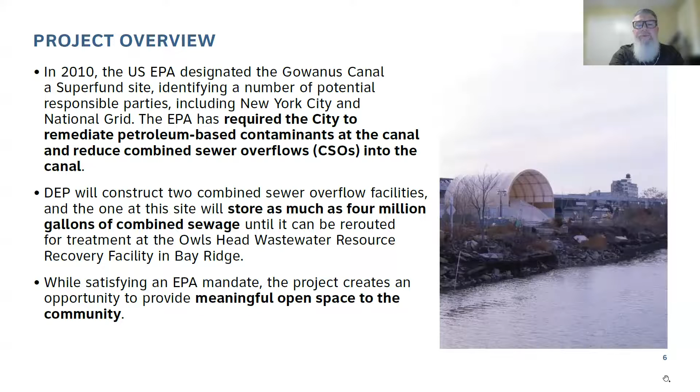You might recall this slide from the last public meeting we had. Just to review again, what a CSO is, or what a combined sewer overflow is. During dry weather, all sewage that comes from people's homes and businesses is sent to the wastewater resource recovery facility. In this case, it's the Owl's Head facility in Bay Ridge, and that treats the sewage.

However, when it does rain, the sewers can reach capacity, and an overflow would occur at a regulator shown here as number 4. And so you have a discharge of diluted sewage that would overflow to the adjacent water body. In this case, that would be the Gowanus Canal. I should also mention that approximately 60% of the sewers in New York City are so-called combined sewers.

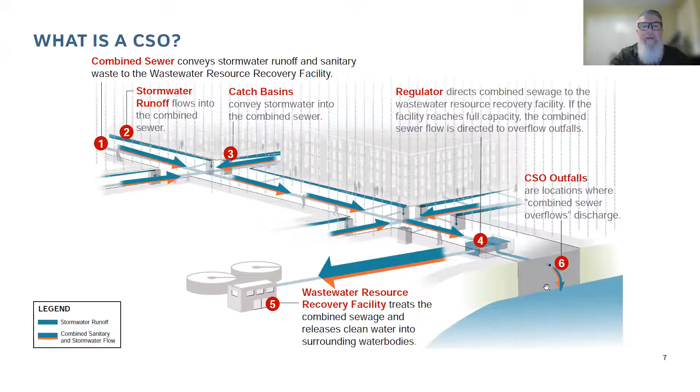So CSO retention facilities collect and store combined sewer flows during wet weather events and then pump that flow back to the wastewater treatment plant. Here's a cutaway of the proposed facility at Owl's Head. Most of the facility is below ground, and the sewage is stored in those below ground tanks. There is a head house, as shown to the right, that houses all the mechanical and electrical equipment, including the screens that will screen out any solid material that's in that sewage, provide odor control, and also houses the pumps that pump the flow back to the wastewater resource recovery facility.

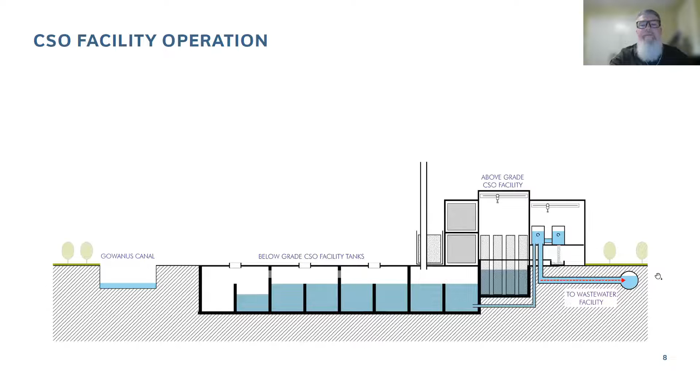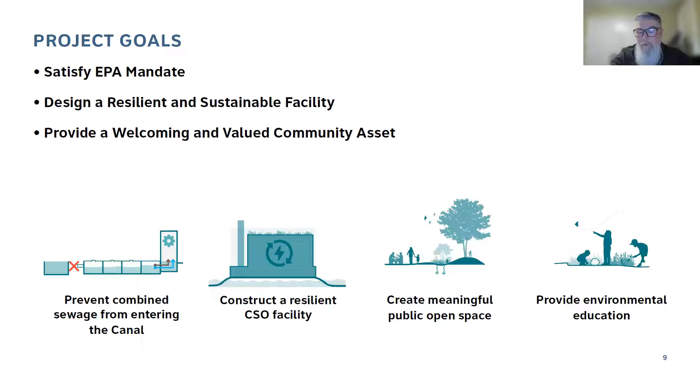So our goals in approaching this project are to obviously meet the EPA mandate to construct the CSO facility, also to construct that facility in a resilient and sustainable way, and also provide a welcoming and valued community asset. We have heard from many folks that embedding a sense of environmental stewardship and education into the project is a priority, and we'll be working to ensure that the project meets that goal as well.

Brief discussion on the schedule. We do have a very ambitious project schedule to meet EPA mandated milestones on both the design and the construction side of things. And we've also been coordinating closely with the existing partners on site. That's the Department of Sanitation and their partners, Big Reuse and the Gowanus Canal Conservancy. This is the second in a series of public engagement meetings, and we'll continue to schedule those meetings throughout the year as the design advances and we're able to focus in on more detail.

The first start of construction is actually underway. You might have noticed that the new bulkhead is being constructed on the northern edge of the Salt Shed Peninsula. And then as far as the CSO tank construction, that is expected to begin in 2023. And as that's moving along, we will have a dedicated community liaison on hand as a direct contact for any community concerns. And construction is expected to be completed before 2030.

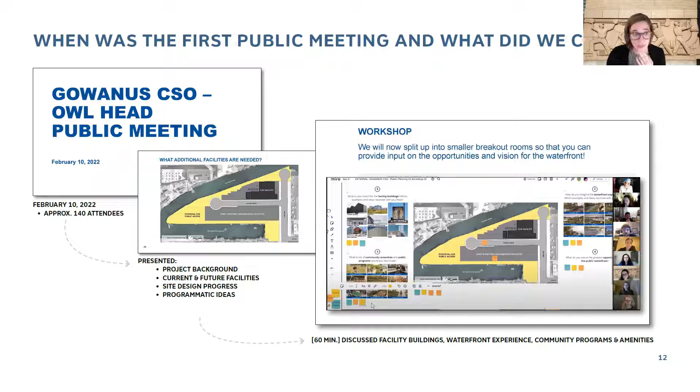So the first public engagement meeting, as I said, was on February 10th, and we had over 140 people attend, which was really amazing. At that meeting, Kevin did a similar overview to what he just did, and we also walked through the facilities that are on site that we need to put back on site, and what we need to build for DEP's project, and then also opportunities for public open space and programming ideas. So then we broke into 3 breakout rooms, and we heard a lot of really great ideas from all of you, ranging from really big picture ideas to the more sort of granular ideas that we might get into later in design. So what did we hear?

Anna, next slide, please. And forgive me while I read this slide, but I think that's sort of the easiest way to go about this. So we had posed questions that broke the categories of feedback down into 3 categories, right? So that we could focus and understand what we were talking about.

So in terms of the facility buildings that we would be creating here, folks were really interested in making sure that the architecture and the urban character was reflective of the Gowanus neighborhood. And they were interested in sustainable strategies such as green roofs and solar panels. They were looking for opportunities for historical interpretation and educational signage related to DEP's operations, and really looking for a reduction in the vehicular presence and a support of pedestrian access around the entire waterfront and the access drive cul-de-sac.

In terms of waterfront experience, folks are really interested in having an ecologically responsive and natural shoreline that supports different habitats and native species, looking for a variety of edge conditions, including hardened bulkheads, softened edges, and boardwalks, looking for boat launches and access points for pedestrians, and improved access and circulation across the site, meeting all accessibility needs.

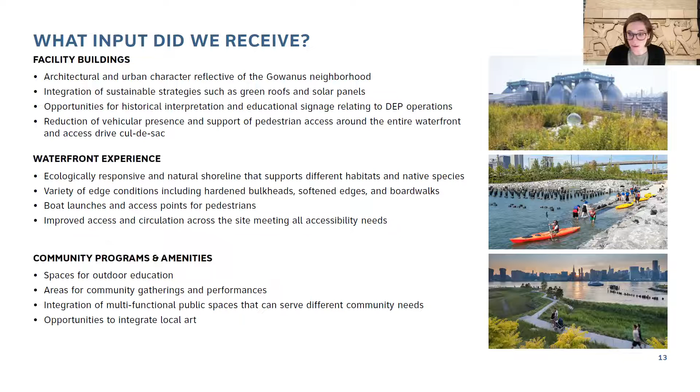In terms of community programs and amenities, people told us that they were looking for spaces for outdoor education, areas for community gathering and performances, and maybe even dance parties. We heard a little about some fun dance parties going on. Integration of multifunctional public spaces that can serve different community needs, so really multi-purpose, and opportunities to integrate local art. Anna, you can go to the next slide.

So this is the plan that we shared at the February meeting, and it's overlaid with site program suggestions and the precedent images that folks responded strongly to. So some of the big moves we're looking to make are to prioritize spaces for outdoor learning and flexible public programming, provide an ADA accessible boat launch at the 6th Street turning basin, make the 2nd Avenue Street end a primary waterfront access point, and provide a continuous promenade along the waterfront with areas of softened shoreline and tidal marsh, and really integrate habitat opportunities into those varied edge conditions.

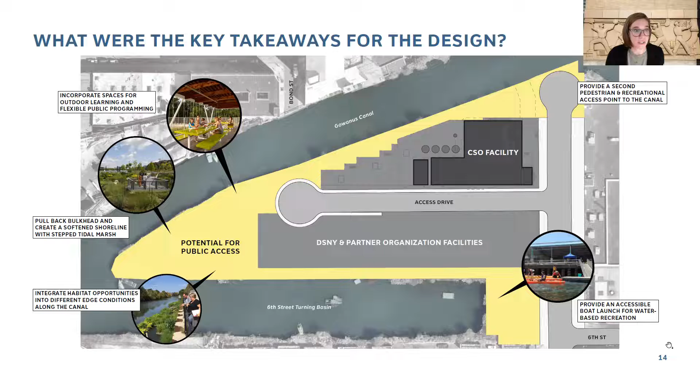So I'm going to hand it over to Kevin Keating from Selldorf Architects to walk you through the site and the circulation in the various stages of work. Kevin, take it away. Great. Thank you, Alicia. And thanks, everybody. My name is Kevin Keating. I am a partner at Selldorf Architects. It is a pleasure to be here with you this evening. Please allow me to take just a little bit of your time to walk you around the site and introduce you to our conceptual proposals for the salt shed.

So what is on the site today? The site includes a variety of things. First, we have the DSNY salt shed, and adjoining it is the Big Reuse composting facility. Second, we have many community engagement programs run by the GCC in combination with Big Reuse. Third, there are ecological elements on the site which we hope to incorporate into the proposal for the peninsula. And lastly, there are a multitude of manufacturing and industrial businesses south of 5th Street, which DEP is working to relocate.

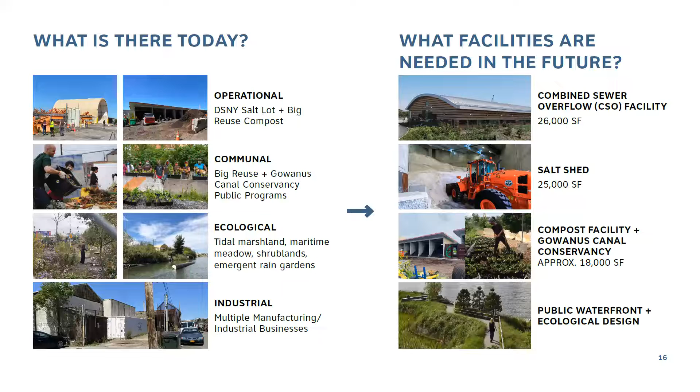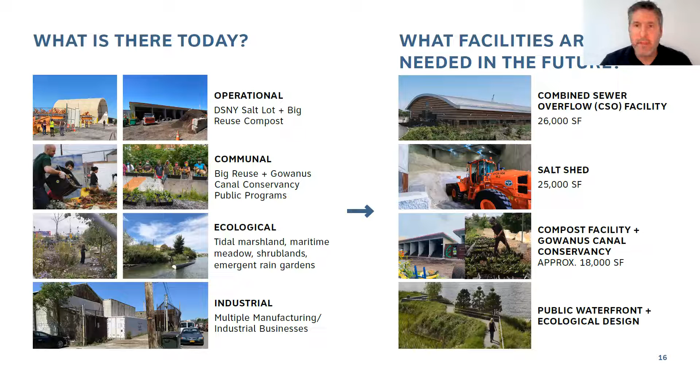So, what future facilities are needed? This project starts with the city's need to build a CSO facility. Secondly, the project needs to provide continuous and uninterrupted facilities for the DSNY operations. This will include a newly designed and constructed salt shed, which we'll get into shortly. In combination with this, we will also be providing new facilities for composting, as well as dedicated space for the GCC. And lastly, but most importantly, for the community, we are looking to provide public waterfront access.

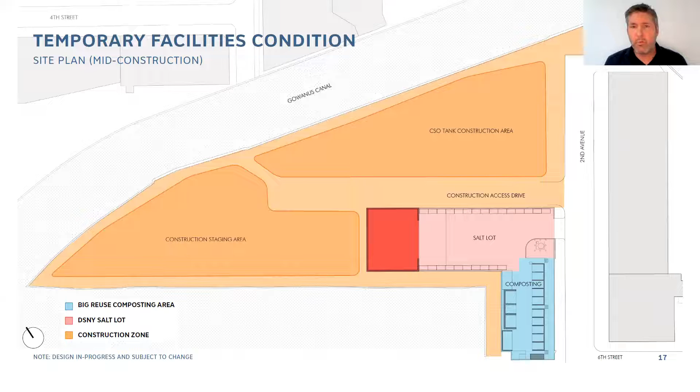Next slide, please. This here is a plan of the site in its temporary condition. This shows you how the site will be configured as we are building out the CSO facility. Everything in orange is the construction zone. The DSNY salt shed and the yard in red are going to be relocated south of the peninsula, as you can see here. And the composting facility in blue is located for easy access near 6th Street along 2nd Avenue. The salt shed is in its permanent location as indicated here, but the composting will be relocated in its final condition.

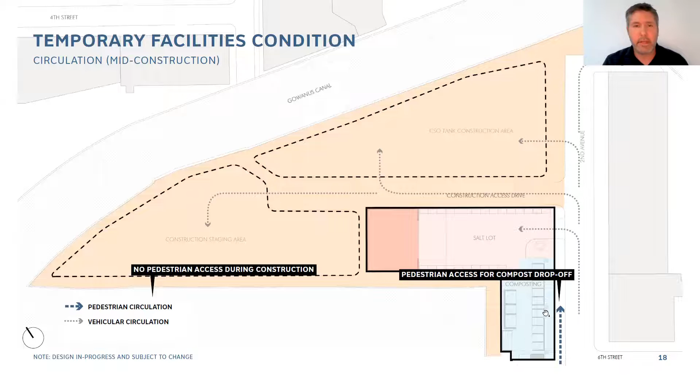Next slide, please. This here is a vehicular circulation diagram. During construction, we'll have construction trucks coming in and out of 2nd Avenue. DSNY salt and composting trucks will also have access, two-way dedicated access off of 2nd Avenue. And south of that, towards 6th Street, and very important, we're maintaining public access for those who drop off their compost.

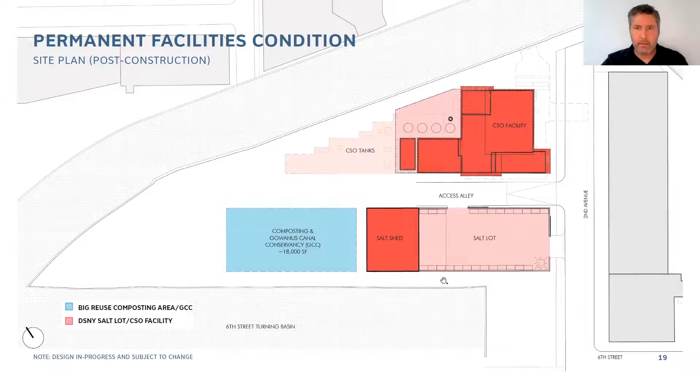We're working together now with GCC and Big Reuse to understand their future needs and their access requirements, but they will access their space from the central alley. Our intention is to make sure that this access alley, a shared street, will work both for the public and for the operational needs of the two facilities.

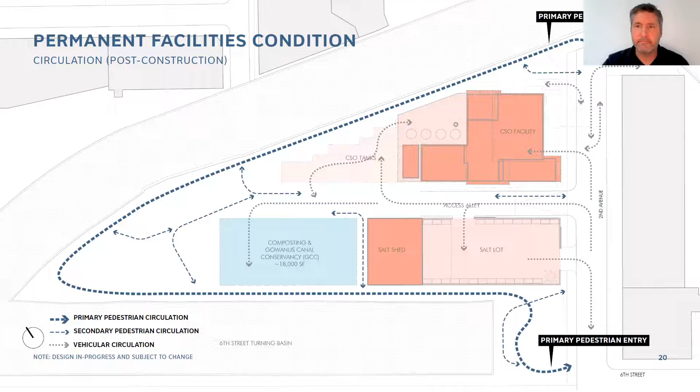Now we'll walk you through the conceptual design for the salt shed. This proposal will be reviewed at a conceptual level with the Public Design Commission next week. In order to properly design this facility, we and the team had many meetings with the DSNY to understand their needs and the requirements. So simply put, here are the main drivers. First, let's start with the salt pile. This salt is used to help remove snow and ice during winter snowstorms, as we all know.

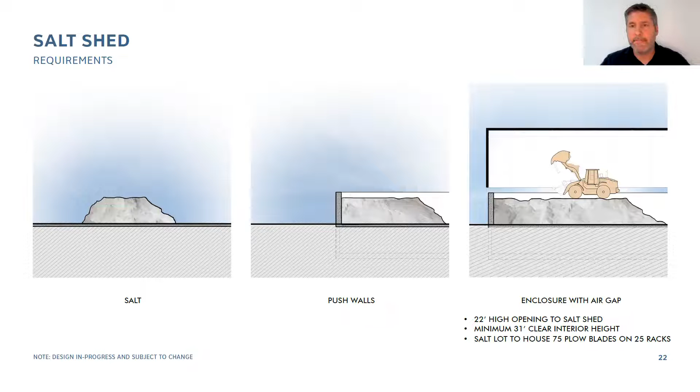Next, please. Now that we understand the basics of the salt shed, let us dive into our understanding of the context in which this project is in. The site is located in the IBZ zone, the South Brooklyn Industrial Business Zone, which was established to grow and preserve the industrial space in an urban environment where neighborhoods change quickly. The character of the site is distinctly industrial, and the surrounding Gowanus neighborhood is marked by a consistent and monochromatic material palette of low-rise warehouse-style structures. Next slide, please.

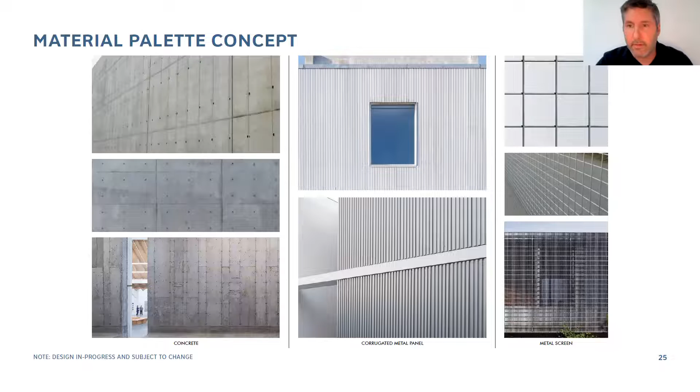First, the cast in place concrete for the push walls. These can withstand the force of the salt being pushed against by the front end loader. The corrugated metal siding for the enclosure above the pile, and a transparent screen made of metal mesh for the perimeter fencing. The material palette has been selected to be restrained and contextual to the neighborhood's industrial yards, sheds, and buildings. Next slide, please.

These materials will be applied in 3 simple yet functional forms. First, the concrete will be used to create the push wall that wraps the perimeter of the site. We have designed the wall so that it starts at a very low elevation at 2nd Avenue, page right, and then gradually rises as it makes its way towards the salt shed to the left of the page.

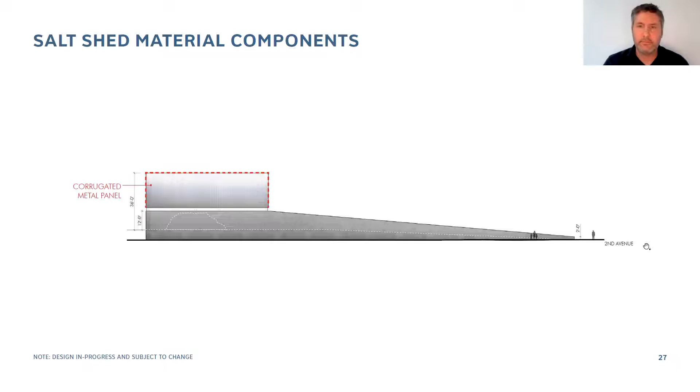Secondly, the corrugated metal panel is employed as a refined surface treatment on the shed, protecting the salt from the elements. In addition to this, I just might note that there will be a solar array on top of the roof.

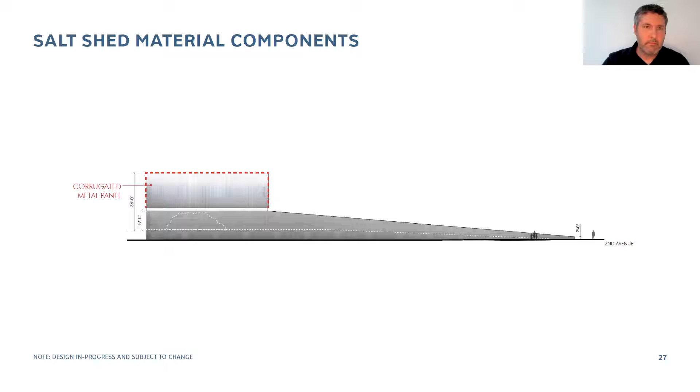And last, the screen made of metal mesh creates visual transparency and a protected enclosure that is needed around the eastern end of the facility, particularly along 2nd Avenue. We wanted to create a visually porous enclosure at this end as one walks along 2nd Avenue.

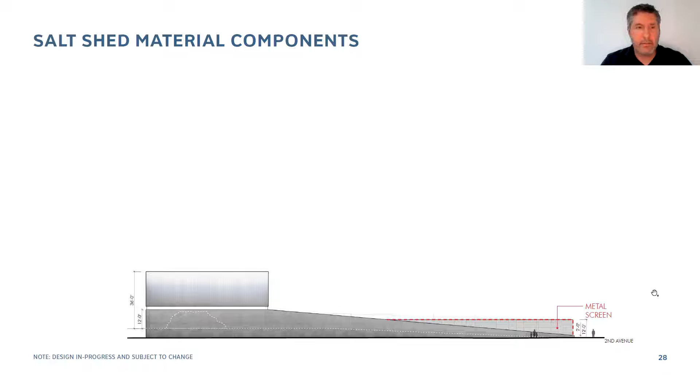Ultimately, the industrial yet refined design is intended to sit within the waterfront landscape, striking the balance between natural systems and industry, which is a defining character of Gowanus. Some suggestions of the waterfront landscape concepts are here in the next slide.

This is a 2-dimensional elevation. For those that may not be familiar, it is a flattened view of one side of the project. This drawing shows how the design will look if you are looking north at the salt shed or walking along the water's edge at the 6th Street turning basin. In the foreground, you can see that we are exploring multi-story landscape concepts, and we are working with our friends over at Scape to develop these conceptual ideas in partnership with the community.

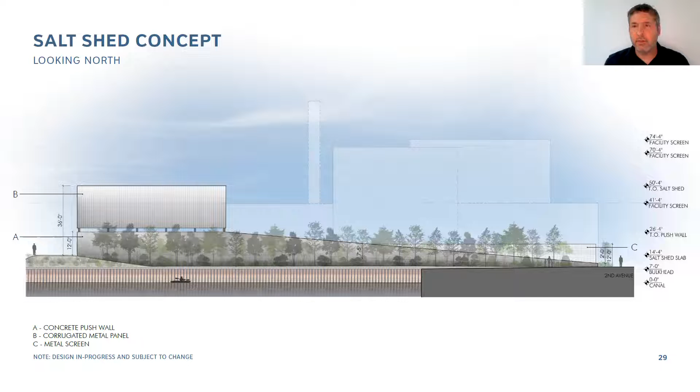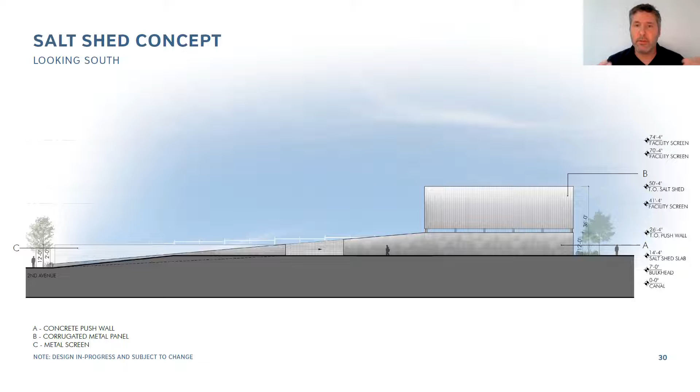Next slide, please. This is now an elevation looking south, as if you were walking along the soon-to-be access alley. You can see here the subtle rise of the concrete push wall and the interaction between the materials and forms of the facility.

And last slide here. And lastly, this is an elevation of the salt lot looking from 2nd Avenue. You can see that the salt pile is tucked in there under the simple and refined form of the salt shed in the distance. The metal mesh screen in the foreground provides pedestrian visual access to the functions and happenings of the facility. We believe with the community that industrial architecture should be true to its function, that these functions and forms can be designed and developed in a way that provides a neighboring backdrop that is intriguing and sublime.

Again, I thank you for your time. My team and I look forward to continuing to hear from you and talk with the community. I now pass it on to Anna at Scape.

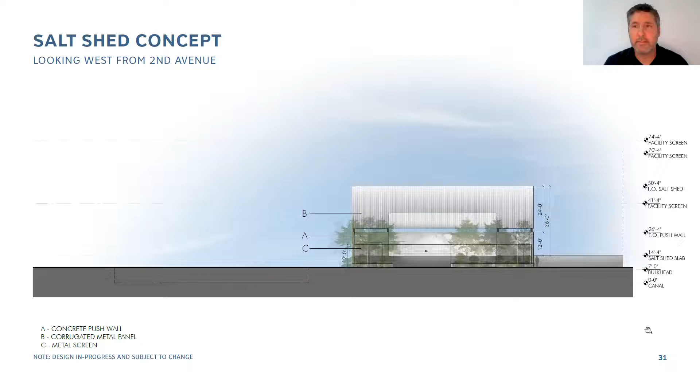Hi, I'm Anna Hogalter, landscape architect with Scape. So since our last meeting, we've really had a chance to digest the input and discussions that we had with you in February. We're excited to have the opportunity to hear new voices and to continue the conversation today with you. So we started with developing our own design goals that can set forward the public realm design based on the overall project goals, balancing a number of different facilities, and integrating the public input that we heard from you in the last meeting.

So we're really focused on improving the site resiliency to both inland flooding as well as accounting for climate change. We're focused on supporting ecological functions and environmental stewardship. We're providing public access to the water as well as along the waterfront, and celebrating the neighborhood's cultural and historic character. And while we're seeking to achieve all of these goals in the public realm design, we need to be sure to balance the variety of city services and operations that will be happening on site with the public programming, and to ensure site safety for this type of mixed use industrial area.

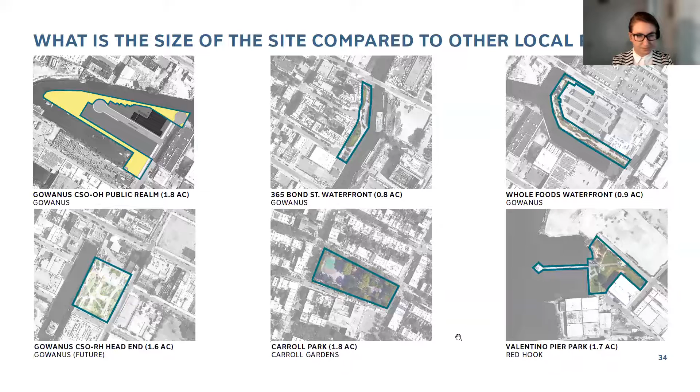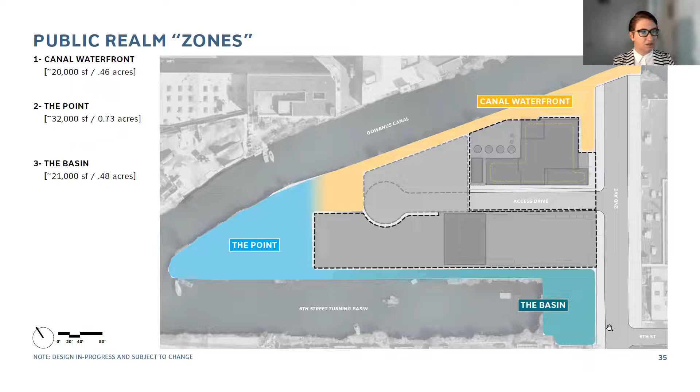And we started overlaying some key programming that we heard from the last meeting, starting to imagine what this space might feel like, but really trying to identify the various opportunities and constraints that exist within this site. There's a lot going on here. 2nd Avenue has a lot of vehicular use with the adjacent facility. There will be a lot of new vehicular needs with the CSO facility entering and maneuvering around 2nd Avenue, as well as in the access drive. But we see 2nd Avenue again as a key pedestrian entry point up into the waterfront zone and along the waterfront canal and canal walkway.

The larger zone here at the point, we've identified this as a great opportunity for tidal wetland design. In order to design a tidal wetland that can account for rising seas and changing climates, you need quite a bit of area to account for that sea level rise. So we see this as a great opportunity to investigate that type of use here, as well as have more outdoor classrooms that can really enhance and focus on the ecological stewardship that we heard about in the last meeting.

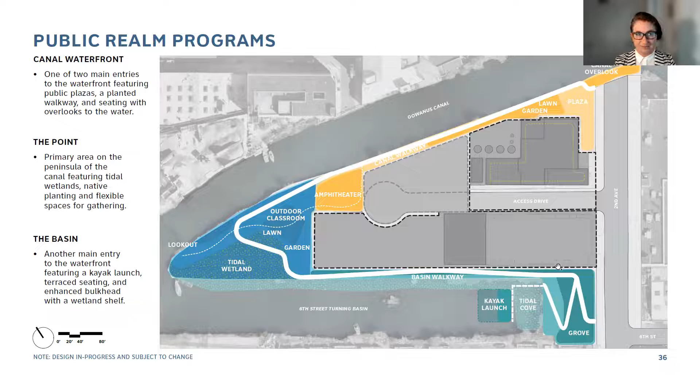Thanks so much, Anna. So we're really excited. There was a lot of great feedback. A lot of it was able to be integrated. Some of it was not, and we're happy to talk through some of those decisions today. The plan that you see on the screen in front of you, I really want to stress this, is a plan in progress. We want to be open and transparent about where the team is at. This project is a complicated project. It involves many different stakeholders, community members, different nonprofit organizations. It also involves many different agencies and infrastructure needs.

And so this plan, while it's our working plan, is a schematic diagram. Right now, it's not a fully resolved landscape plan. And it's in the process of being reviewed by not only DEP and DSNY, Big Reuse, and the Gowanus Canal Conservancy, the partners on the site. It's also being reviewed by the EPA, which is controlling and advising on the bulkhead and edge conditions and the overall Superfund cleanup, and also Parks Department, who will play a role in the long-term stewardship of this project. And so these different agencies are all influencing the development of the plan that you see in front of you.

While it's still very much a draft, we came to you today to share this draft with you to get your feedback. And this is a really important point in the process. And so I will kind of talk through some of the elements here. There's a lot of development to go, right?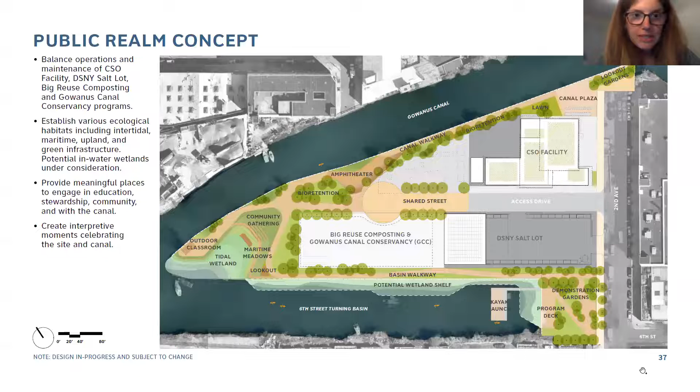to the expansive canal, and also where the 2nd Avenue end was analyzed by the engineering team and did not have capacity or width to support any type of truck or vehicle with a trailer and a turnaround and adequate parking space for those zones. So just want to put those parameters out there because they help shape the site design. But let's move on to the next slide and we can kind of walk through the design proposal here, and then we will hear your thoughts on it.

So looking at the Canal Plaza here at the end of the canal waterfront, the end of 2nd Avenue, we were able to, again, pull that large turning radii back and prioritize more space for pedestrians at the end of 2nd Avenue. We know it's an important community overlook. There may be an opportunity to add more seating or a slight step down in that location. Our team is still investigating that.

We're showing a gathering plaza here along the canal. This overlaps with some needed vehicular access points to the CSO facility. And we see a lot of opportunity for integrating with the Selldorf team's structure around how to have the architecture and the landscape work together really well at this moment to educate around the CSO tank. A pedestrian would walk along the canal walkway and move towards the end of the shared street where we've placed an amphitheater.

So this is that shared street location that we're able to pull back the turning radii of the turnaround at the end, which we do need for issues of FDNY and fire compliance and site access for Big Reuse and the GCC, as well as the CSO facility. We've reduced that vehicular area as much as possible and tried to create a large scale community gathering space,

this amphitheater that steps down closer to the water and also aligns with the Bond Street visual connection. So there'll be a really interesting connection across the canal from Bond to the amphitheater. So it's like dialogue across the canal. You can move to the next slide.

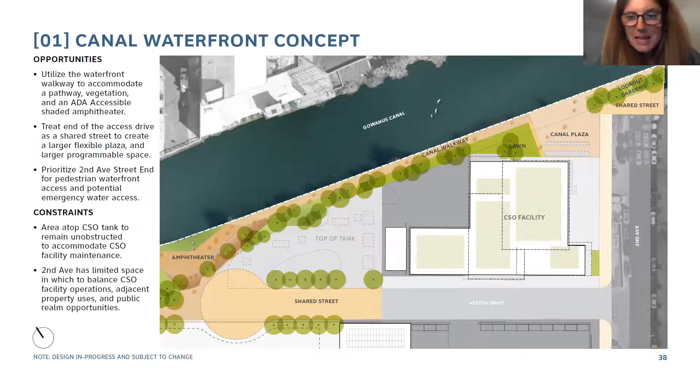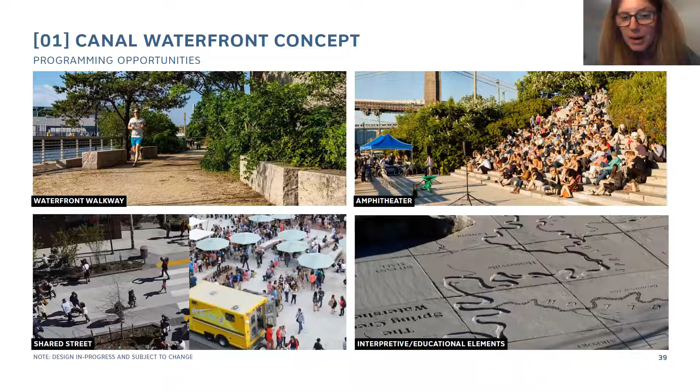Here on the point, I think we're very excited about the point. It offers a lot of different diverse landscape experiences. I know that's been a priority of the Gowanus by Design work and the Gowanus Lowlands work to have these diverse ecosystems that represent the historical ecologies of the canal expressed within the physical fabric of this site and this project. So we've tried to be very responsive to that feedback.

So we're in coordination, reaching out to the EPA about this marsh proposal at the tip, with the marsh facing the basin edge and transitioning between low marsh, high marsh, maritime meadows, scrublands, and that rich cross-section of ecosystems that can exist when you don't have a harsh slope, when you have a low, shallow gradient. So we're very excited about that.

We think there's a great opportunity to have that kind of unravel into a community gathering space. You could actually host a group of people in an outdoor classroom format or informal seating format, looking over the marsh with a stage or a platform or a boardwalk at the base.

We've also proposed elevated gathering space, a kind of flat, a non-stepped outdoor classroom on the tip of the point that would look over to the Gowanus Green site across the canal and be highly visible in the greater community. We think that space will provide really excellent views up the canal, down the canal, into the greater neighborhood.

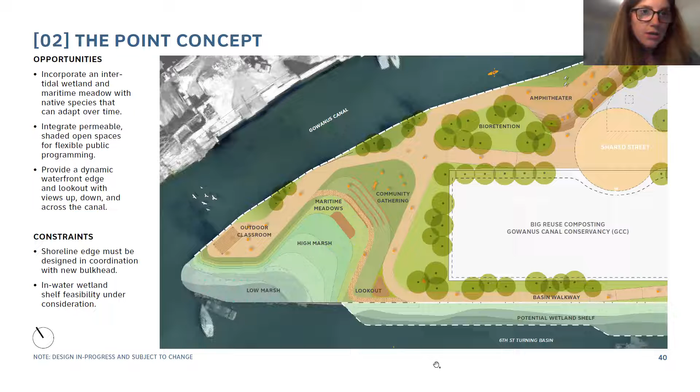We're also exploring the potential for a wetland shelf as shown on the bottom here on the 6th Street turning basin. It's highly conceptual, but we are starting those conversations because we see that as a great opportunity for more aquatic habitat. Next slide.

I think that's something we heard a great deal about in our last conversation with all of you and your fellow community members. And then we heard from the GCC and other partners that there's a desire for many types and scales of group gathering and outdoor education within the site, not just a single zone. Next slide.

And then within this third zone, the basin, I think this is a very important part of the project. Parks Department in particular is very interested in ADA access throughout the project. Every program area, every piece of the site that is publicly accessible, it's going to be our goal to make it ADA accessible. So not just compliant, but really think about ADA accessibility.

And so that is one of the driving criteria to locate the kayak launch in this location where we really have room to grade down the proper slopes to allow access to all for the waterfront.

It's also at this core position right at the base of 6th Street, where it's very visible to the community. So it's easy to access. You can see here the slope embedded in the ground going to a lower program deck that could overlook the canal, and then a gangway or walkway out into the water that could lead to a kayak launch and floating platform. And so the exact configuration of this space is all in development, but the goal here is to create direct ADA accessible public waterfront and a nice park space at the base of 6th Street.

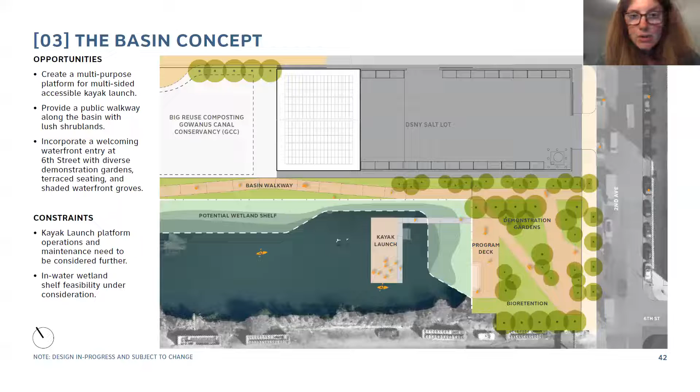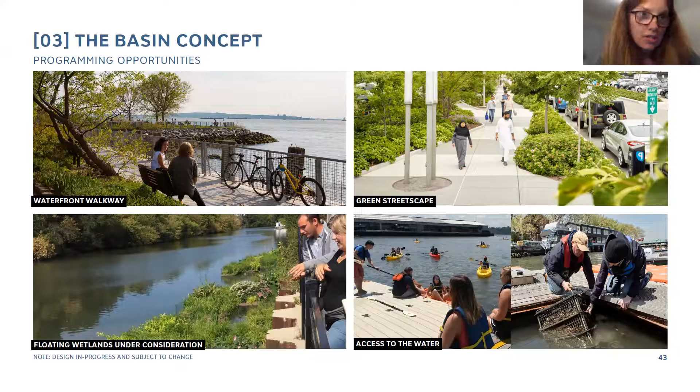So with that, I think I'll pass it back to Alicia to talk about our breakout rooms. Yeah, thank you, Gina. So we're going to break out into 2 workshop groups now. They'll be facilitated by SCAPE and Selldorf with the rest of the project team as well. So this should happen automatically, but there may be a small pause in your Zoom while it sorts you, so don't be alarmed. We are really eager to hear your thoughts. I've seen a lot of activity in the chat. But I just want to remind everyone, let's please keep our comments concise and focused on the design and program and respectful. We want to make sure that we hear from everybody that we can, but you can always get in touch with us and there'll be some information about that towards the end of the meeting. So with that, Gurma, can you please sort everybody?

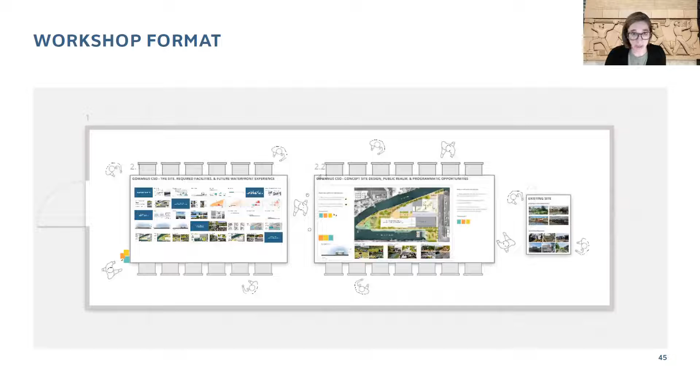We'll see you on the other side. If you could put the PowerPoint back up for the last slides. Thank you. Okay, so we're going to wait for other folks to come back in. I think someone was mid-sentence in the other room. Okay, I think we have everyone back.